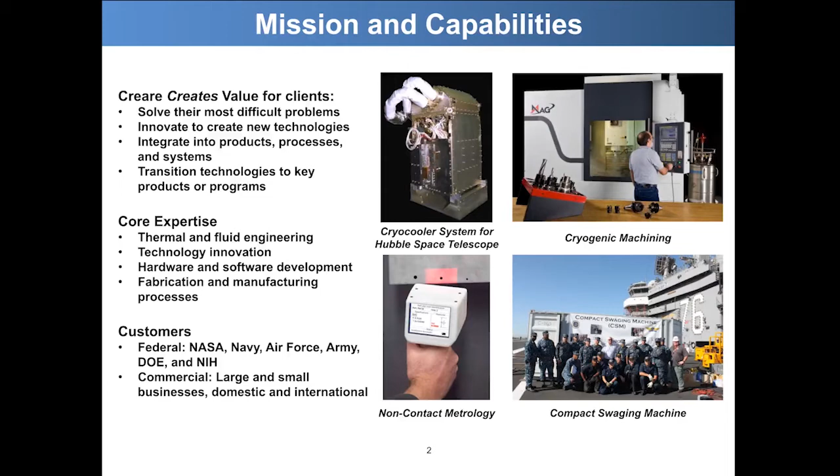Particle ingestion is important in gas turbine engines, especially in engines used for low altitude aviation applications. This would include aircraft like helicopters or tilt rotor aircraft. Particle ingestion impacts engine maintenance and intervals, the durability and lifetime of an engine. It impacts the logistics associated with engine ownership and operation and the total cost of ownership of these systems.

The clogging can impact cycle performance by degrading the engine or by imposing requirements for filtration or particle separation on the cycle. And in extreme cases, particle ingestion can actually lead to engine failure during flight and crash of the aircraft. Our goal is to develop a new flight sensor for detection and classification of ingested particles. The purpose is to provide early warning when there's an acute risk to the aircraft due to particle ingestion, and also provide data in a cumulative fashion over time for maintenance planning.

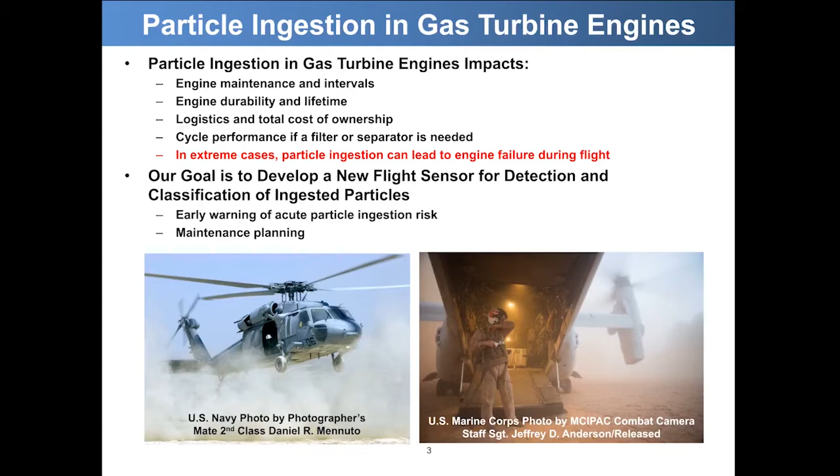Gas turbine engines are susceptible to clogging because there are many narrow flow passages and channels inside a gas turbine engine. Notable are cooling holes that are found in combustion liners and turbine blades. In addition to just physical blockage due to the presence of particles, there's a problem known as the CMAS problem. And CMAS is an acronym that stands for calcium, magnesium, aluminosilicate. These are elemental components that are commonly found in sand and dust that are ingested into engines. And CMAS refers to components that have low melting temperature relative to silica, which is sand and has a high melting temperature.

Historically, the operating temperature of gas turbine engines has increased over time as improvements have been made in cooling and the materials that are used in the engine. And that's shown in the plot at the bottom of the slide. The x-axis here is the year, and the y-axis is turbine temperature. And you can see that there have been certain jumps in performance related to things like film cooling and cooling strategies in turbines, the emergence of thermal barrier coatings, and the emergence of ceramic matrix composite materials.

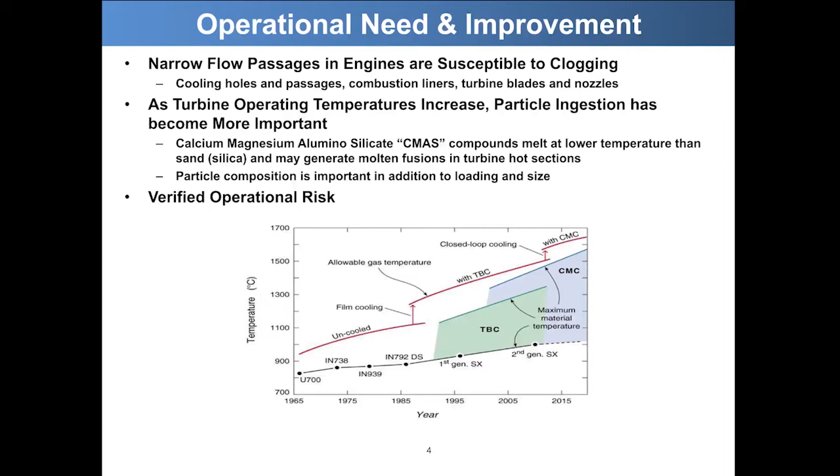And this is a verified operational risk. There have been some notable incidents in the news, particularly a crash of a V-22 at Bellows Air Force Base that was related to sand and dust ingestion. So this is a known verified issue that can acutely affect the safety of aircraft.

That brings us to our sensor technology. We call our sensor EPIC. It stands for Engine Particle Ingestion Classifier. EPIC is a suite of sensors, including different types of sensors that have different functionality and purpose.

One sensor is an optical sensor that measures particle size and load. So these are two of the physical properties that you would want to know about the sand and dust that's being ingested in the engine. This is the easier measurement to make relative to the composition measurement, which I'll talk about next.

Optical sensors are laser-based. They tend to have very low size, weight, and power. So they're well suited for integrating with engines. And the sensor that we're using is derived from a sensor from a company called Measurement Science Enterprise, MSE, and they call it a micro-V.

The micro-V involves two laser sheets that are projected into the flow, and two sensors that record light scattered from the laser sheets as particles transit them. The sheets are separated by a known distance. So in addition to counting particles as they go by and interact with the sheets, you can get velocity information from the micro-V. And this sensor was actually developed for velocimetry applications in fluid dynamics.

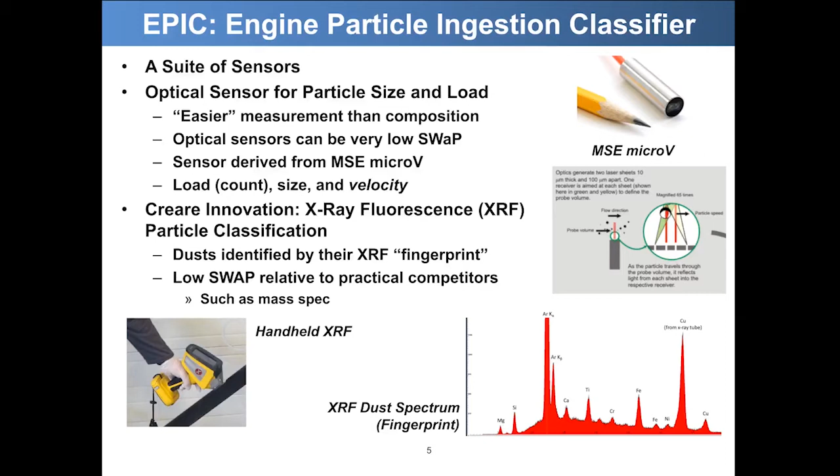This slide talks about the current status of our program. Previously, we demonstrated particle size, loading, and classification in a laboratory environment using laboratory sensors. So we used commercial off-the-shelf X-ray fluorescence sensors and the standard configuration of the MSE Micro V for optical counting and sizing.

What we're currently working towards is developing a flight or a flight-like version of the technology. So we've developed a custom XRF that has low size, weight, and power and is optimized for the dusts that are of interest to the current application.

We've also developed a flight version of the optical sensor that is configured a little bit differently than the commercial sensor. And we've developed a number of integration components such as optical windows and concentrators that can be used with the sensors and configured for different applications.

The purpose of our current project, which is a Navy STTR Phase 2, is to validate the flight versions of our sensors on a high-fidelity rig test, which will be performed at GE at their Lynn, Mass facility.

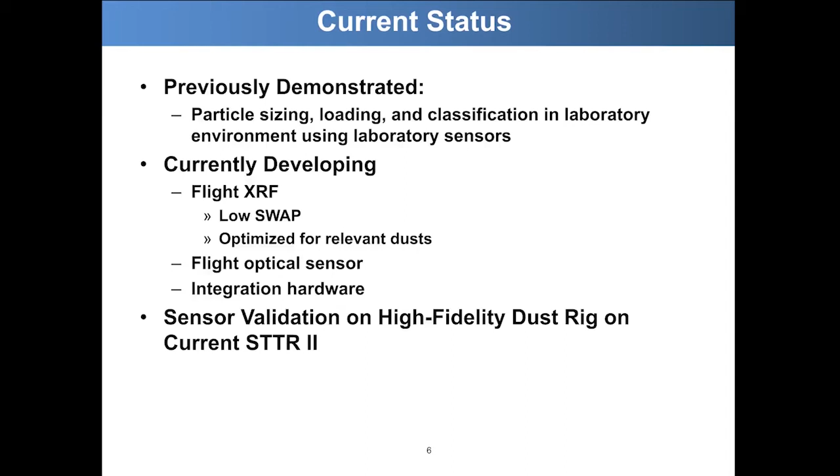This slide speaks to the benefits and advantages of our technology. First and foremost, we're trying to provide a real-time flight capability for measuring particles ingested in engines. This is a new capability.

Currently, military aviators have no feedback on sand and dust ingestion, other than if there was a significant performance shift to the engine or their visual acuity and observation of the conditions outside the aircraft, for example, if they're flying in a brownout.

So at its core, we're trying to provide a new capability that will provide information to help pilots understand the risk to their aircraft. Our technology involves a new way of classifying the particles. So in addition to just telling you the amount and the size of the particles, we're going to provide information on the composition of the particles.

And this is important for things like understanding whether you're ingesting CMAS particles that could have low melting temperature and could have elevated risk relative to higher melting temperature particles. And the way that we do this will be by providing these XRF fingerprints and analyzing those data to determine whether a dust is a good or a bad dust.

Our approach provides capability in the most compact and lightweight footprint that we can provide. The optical sensor is inherently compact, and the XRF sensor is larger and has higher SWaP, but it is reasonable in its SWaP trade relative to technologies like mass spec.

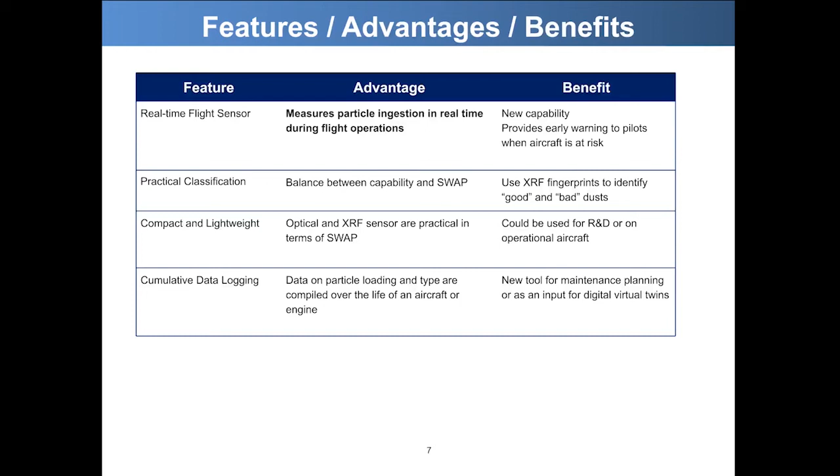The slide talks about transition of the EPIC technology to the end user, and our initial end user will be naval aviation. Our current project is focused on integration hardware and a sensor rig demonstration. That project is slated to end Q1 of 2022, and we're in the thick of that work currently as we speak. Subsequent to our STTR, there is an option component that would involve an engine test.

This would most likely be a rotary wing aircraft, and we're projecting that would occur in the 2025 timeframe, and actual transition would occur in the 2025 to 2026 timeframe. The primary transition advocates for this would be the multi-mission helicopters program, H-60, which uses the T-700 engines. We would also be interested in engines like the ITEP engine. And also the V-22 Joint Program Office has significant interest in technologies for sand and dust ingestion.

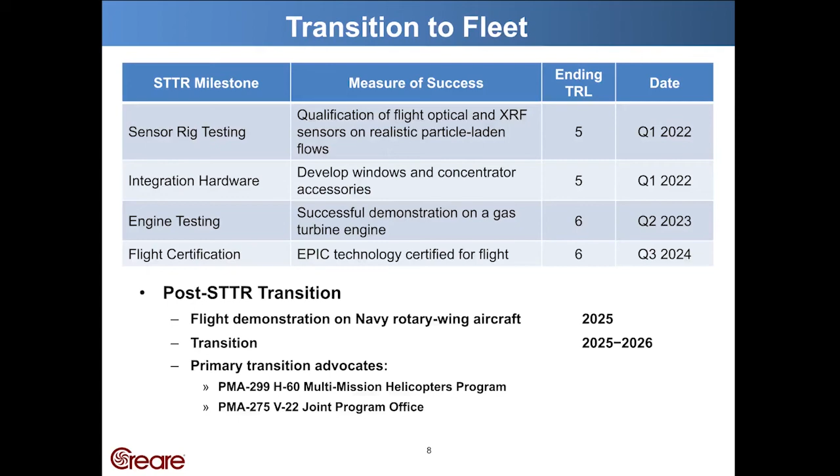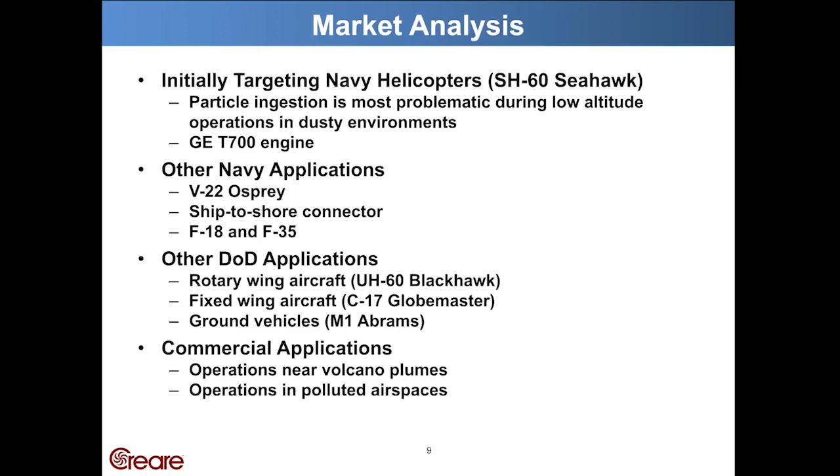Our approach for transitioning this technology is to transition the optical sensor through our partners at Measurement Science Enterprise, and to separately transition the X-ray fluorescence sensor either by licensing to an existing X-ray vendor, such as Proto Manufacturing, whom we've worked with to develop the custom XRF, or a company like our sister company, Darin. Darin is a Creare affiliate. They work on low-rate initial production of highly engineered products, and we've successfully used this model for other technologies like the Creare compact swaging machine that was licensed and assembled at Darin.